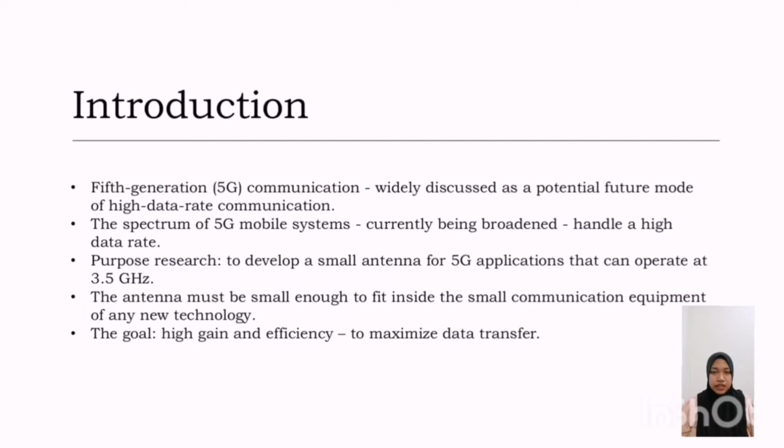Next is the antenna. Substrate, patch, and ground plane are the three main components of the microstrip antenna designed in the 3.5 GHz band. The substrate is designed with a box of FR4 epoxy with a dielectric constant of 4.3. The height of the substrate with respect to the z-axis is 1.6 mm. The ground plane is formed at the substrate bottom, resulting in the coplanar waveguide structure. The outer box is made of air assigned with radiation.

These are the design parameters of the antenna for this project. Its major axis is 22 mm, its minor axis 13 mm, matching line length 18 mm, matching line width 2.9 mm. Height of substrate is 1.6 mm. Other than that are substrate width of 48 mm, substrate length of 25.2 mm, ground length of 48 mm, and lastly ground width of 10 mm.

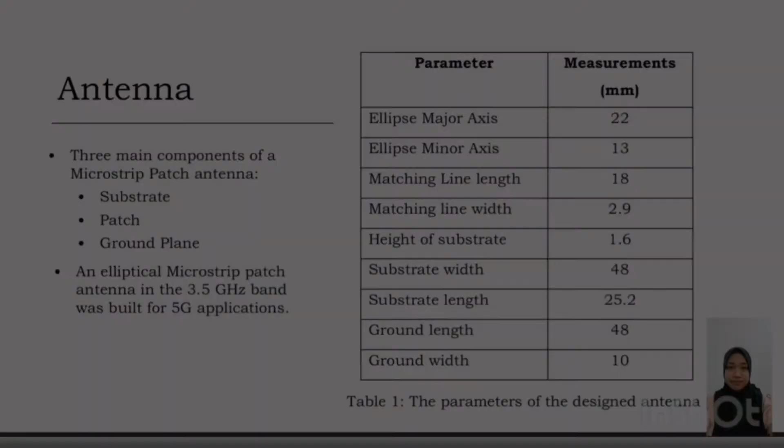Okay, first of all, we will open the CST file, then antenna, planar, time domain, and this one is frequency minimum 2, frequency maximum 4.5, E-field, H-field, and far field, default is 3.5. I need to wait for a while. As you can see here, it's a cube. If I turn around, you can see all the sides are equal.

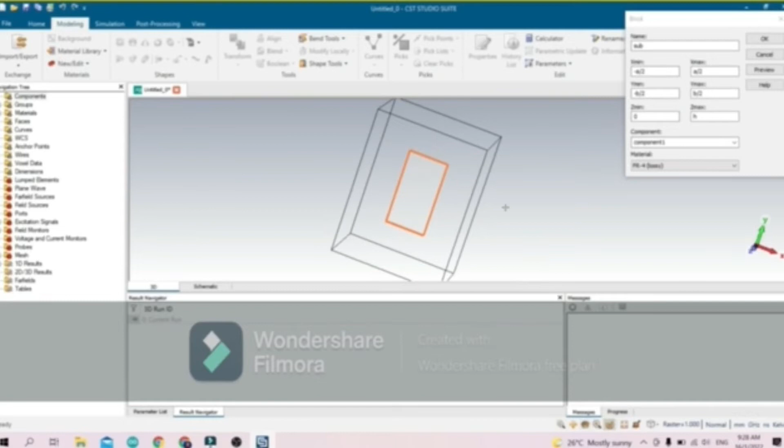For the working plane, I click brick and name it as sub. Negative A per 2, B per 2, A per 2. And for the Z max is H. For the material, we need to use FR4. Add one more brick for the rectangle. For X minimum, A over 2 minus 11.5, because we want to have an equal rectangle. And for X max, A over 2 minus 18 minus 6.5, Y minimum negative 2. And for the parameter it is 0.035.

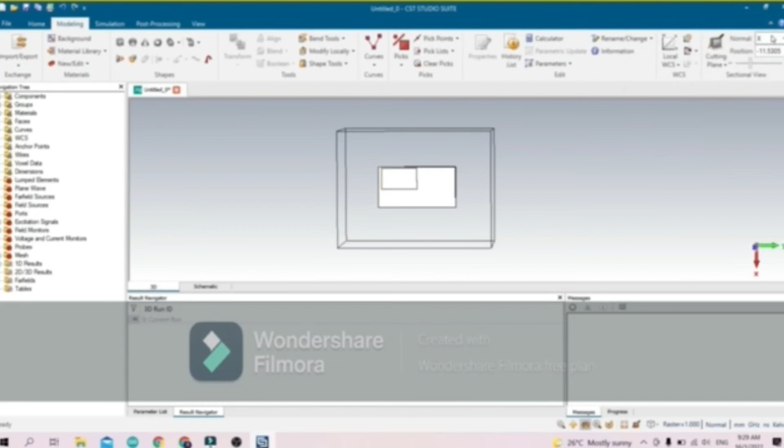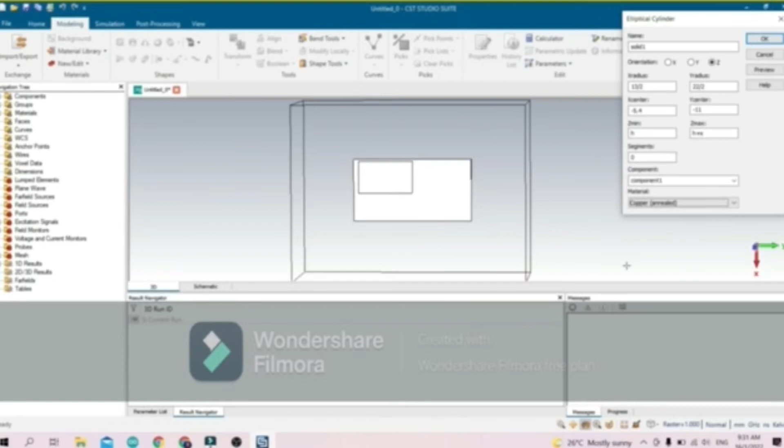Cylinder shape, and then choose elliptical cylinder, and then rename it as el. Okay, then I add one more brick.

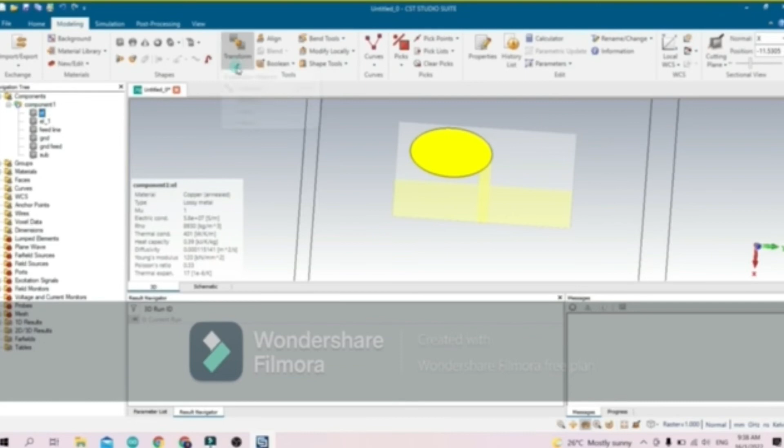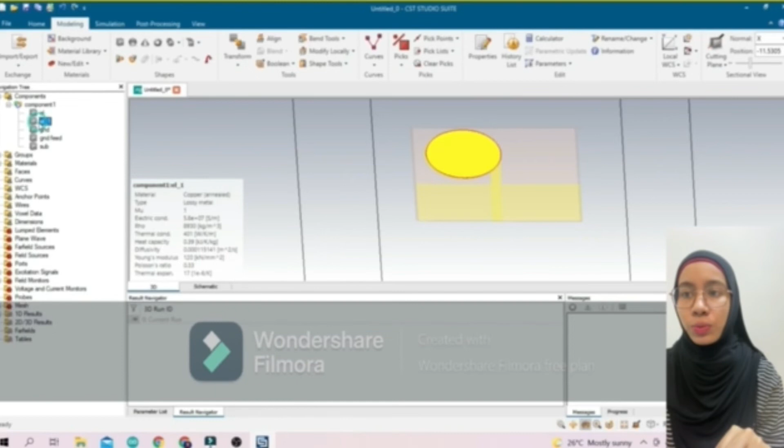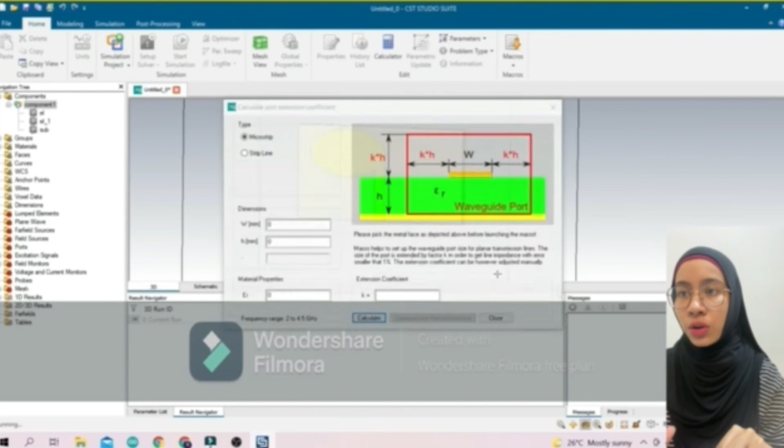One ground and also ground feed, click boolean, then it will be like this. Okay, almost done. Then wait, I want to find the macros. Okay, found. So click solver, ports, and then calculate port extension coefficient. Then simulation, and we got the output for the S parameter like this, and this is what the far field looks like. So that's all.

Directivity is a fundamental antenna parameter which describes how much radiation is emitted in a specific direction. If the antenna is designed to radiate in a specific direction, the directivity is considered critical. So, as you can see here, figure 3 shows the radiation of the antenna, where the antenna's main lobe has a directivity of 5.12 dBi at 76.9 degrees in the theta direction. The side lobe level is negative 12.9 dB.

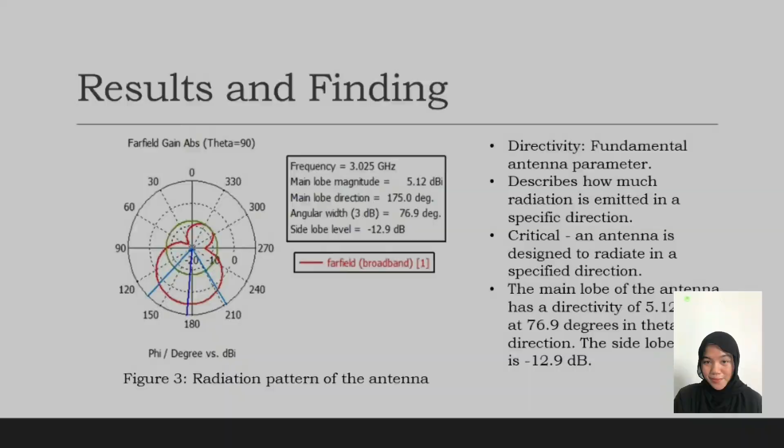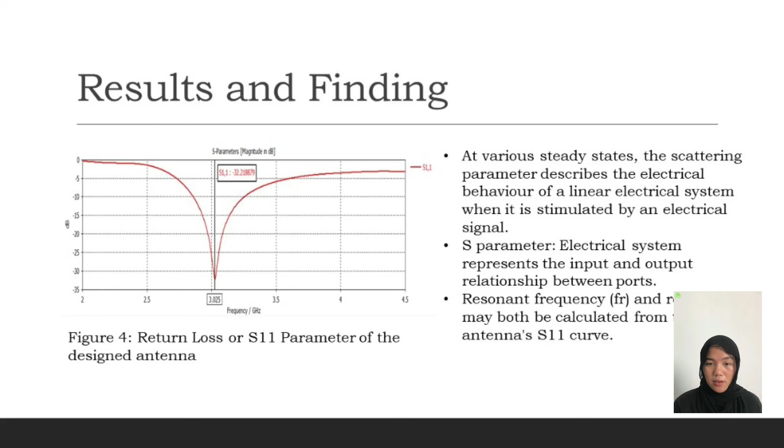Figure 4 shows the return loss or S11 parameter of the designed antenna. At steady state, the scattering parameters define the electrical behavior of a linear electrical system when it is stimulated by an electrical signal. The S parameter in an electrical system represents the input and output relationship between the ports. As is generally known, the resonant frequency and return loss may both be calculated from the S11 curve.

So as a result, the resonant frequency achieved is 3.025 GHz with a return loss of negative 32.219 dB. This demonstrates that the antenna has a very low return loss when operating at 3.5 GHz. This means that the antenna will transmit a significant amount of the signal.

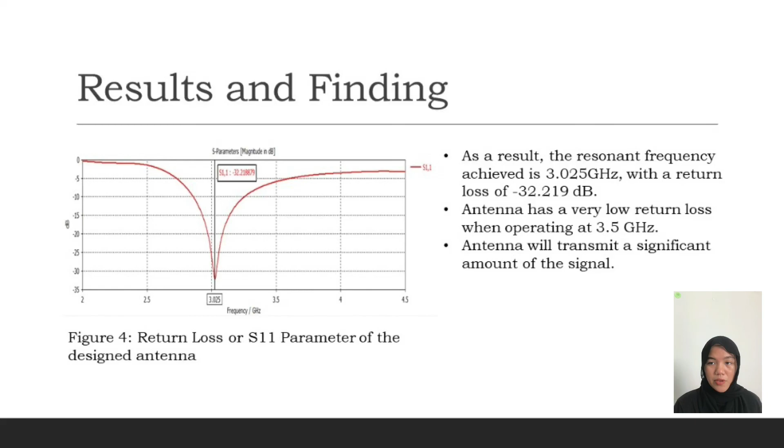The ratio of the power produced by the antenna from a far-field source on the antenna's beam axis to the power produced by a hypothetical lossless isotropic antenna can be seen as antenna gain. At the working frequency of 3.5 GHz, the antenna has a gain of 5.01 dB. The efficiency of the antenna is negative 0.1562 dB or 96.25%.

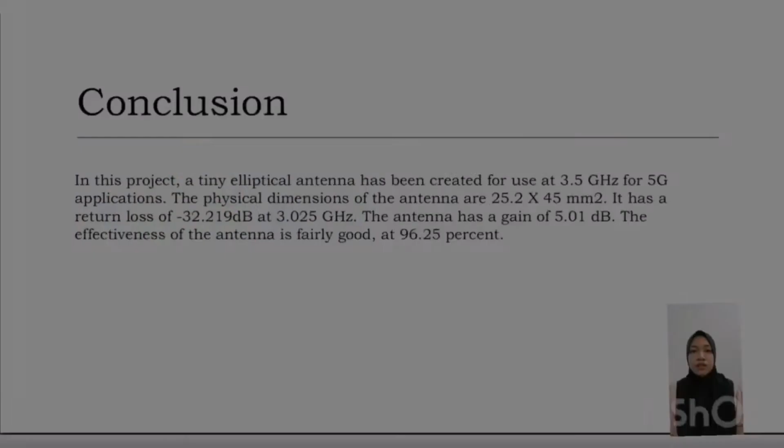Conclusion. To sum up, a tiny elliptical antenna has been built for use at 3.5 GHz for 5G applications in this project. The antenna physical dimensions are 25.2 times 45 mm square. At 3.025 GHz, it has a return loss of 32.219 dB. The gain of the antenna is 5.01 dB. The antenna's efficiency is quite high, at 96.25%.